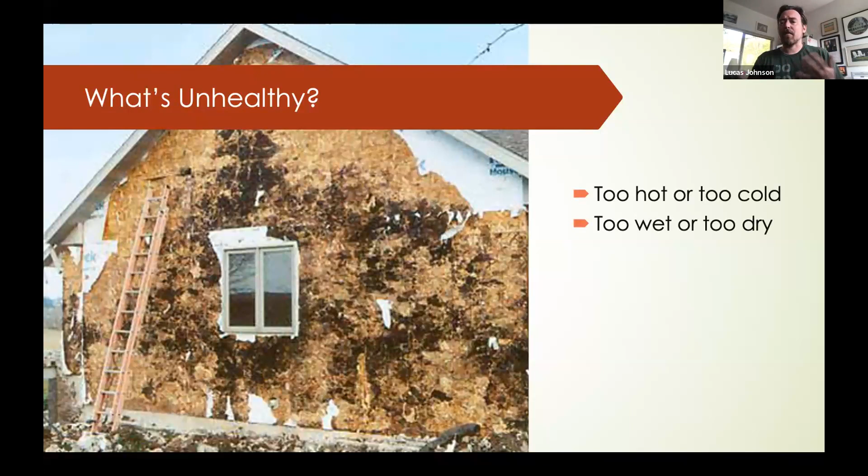To make it very basic, what is unhealthy, right? When things are too hot or too cold, we get a lot of issues. When they're too wet or too dry, we get a lot of issues. So think rot, think mold, that kind of stuff like you see in the image. What's often not really appreciated sufficiently is that toxic chemicals and particulate matter are major, major, major issues to our own health in buildings, right?

And what does that translate as far as materials that are used or things that are used in buildings? That would really come down to natural gas and synthetic materials. So these are two things that we really should be avoiding if we want to maximize our health, the health of the planet, and the health of our communities.

I don't know if you've heard of something called sick building syndrome, but it is a very important thing to understand. It's officially recognized by the medical community. And one thing that's been really neat to see recently is how much the building science community and medical community are actually starting to communicate for once. I don't know why it took so long, but it's definitely a good thing that we're starting to communicate more.

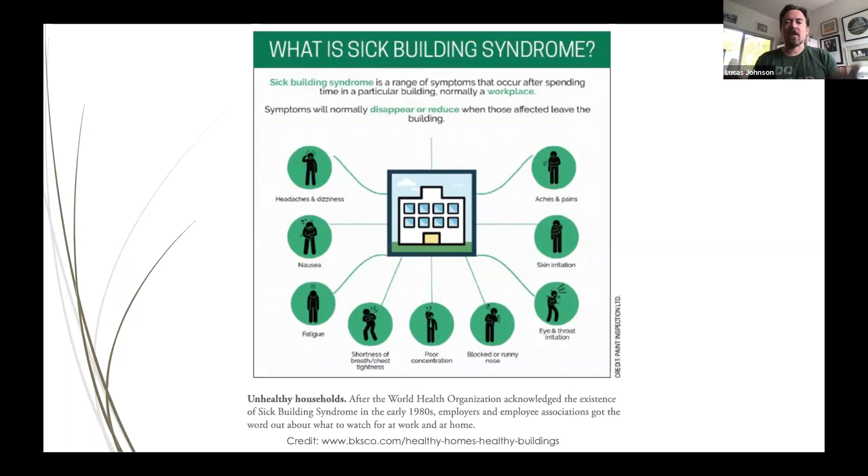So effectively, sick building syndrome can be experienced much the same as a flu or a cold, and that comes from being too wet, too dry, too hot, too cold. Synthetic materials and natural gas tend to be the leading causes of sick building syndrome. So on the flip side, what is healthy, right? This is a very interesting question that's actually more complex than it seems on the surface, because the easy answer is, well, you've removed unhealthy materials, so now it's healthy. But it's a lot more than the lack of unhealthy ingredients.

Two examples. One is, if we're going to optimize indoor air quality, IAQ, we need to not only avoid unhealthy ingredients, so using non-toxic finishes, furnishings, cleaning materials, but we also need to be adding something that provides continuous fresh air, and ideally does that through a heat recovery system, so that when we're providing the fresh air, we're not bringing too much heat into the building during summer or making the building too cold during winter, because again, too hot or too cold is also a health issue. So it goes a lot further than just avoiding unhealthy ingredients. There's also a lot of proactive actions you need to take.

So enclosure systems being foundations, walls, roof systems, that kind of stuff, what the building is actually made out of. It needs to avoid toxic ingredients, but a really critical thing that's very often missed is we need to be able to dry faster than buildings get wet to avoid water accumulation. Water accumulation tends to be the root of all evil in buildings.

So the way we see most buildings built, driving around Phoenix, right? You see OSB sheathing with an inch of EPS foam insulation taped, perforated a ton of times by staples to attach stucco mesh, and then a thin coat stucco goes on top of that. That is not a building system that is able to dry.

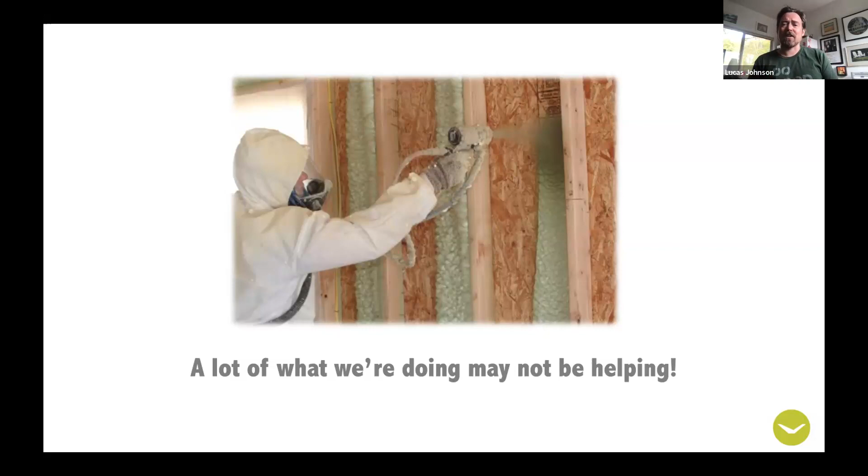It tends to not be installed perfectly, and then water can circumvent it, and then it can prevent drying, so it accelerates rot and mold failures. You can't remove it from wood, so you can no longer reclaim wood at the end of the building's life cycle. Wood that has foam applied to it is now trash. And just on the health side of things, little pro tip here, if you have to dress up like you work for the CDC during an outbreak to install insulation, it might not be super healthy.

So there are a lot of certified buildings out there, and I want to really emphasize that there are so many people who think they're really doing a good thing. This was me as well. At the beginning of my career, I installed a lot of spray foam, and then I started collecting data on it and understanding better the full life cycle carbon impact, the health impacts, going back and doing a blower door test, which tests air leakage in buildings, a year after it was installed, and finding out that the air tightness we delivered a year ago was nearly gone, because buildings move a lot and foam shears off the things it's supposed to seal.

So I really want to emphasize that people are out there trying to do a good thing, genuinely believe that they're doing a good thing, and genuinely want to. But unfortunately, the data does not support that they actually are doing a good thing. So we hope to provide that information and inspire people to keep learning, right?

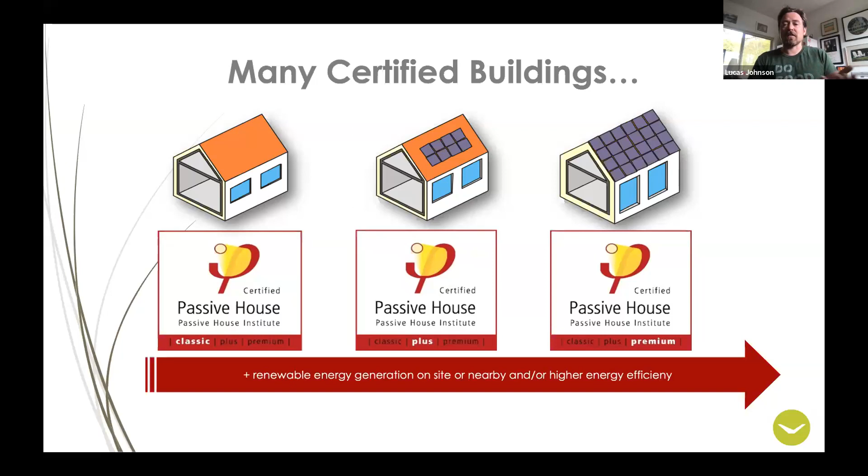A great analogy that can be used is if you're going to go on a diet, right? We need a carbon diet for our buildings. You wouldn't go pack on 100 pounds right before you go on a diet. That would make no sense. But that's what we do time and time again in the built environment. We add a crazy amount of carbon up front to build an efficient building. And then the payback period is often decades, if not over a century. And the well-intentioned building then does not actually achieve its goal of reducing our carbon impact.

So one great way to summarize this is sustainability is no longer about doing less harm. It's about doing more good, right? The less bad approach is no longer sufficient. We need to encourage more good, not less bad.

So digging into that, this is an introduction to our 5 factors. This is how we make design decisions as a company and how we specify the key ingredients to make it actually happen, to actually achieve the goals. So the 5 factors of good building, simply put, are comfort and health, efficiency and renewables, durability and resiliency, social equity and embodied injustice, and life cycle carbon impact, right?

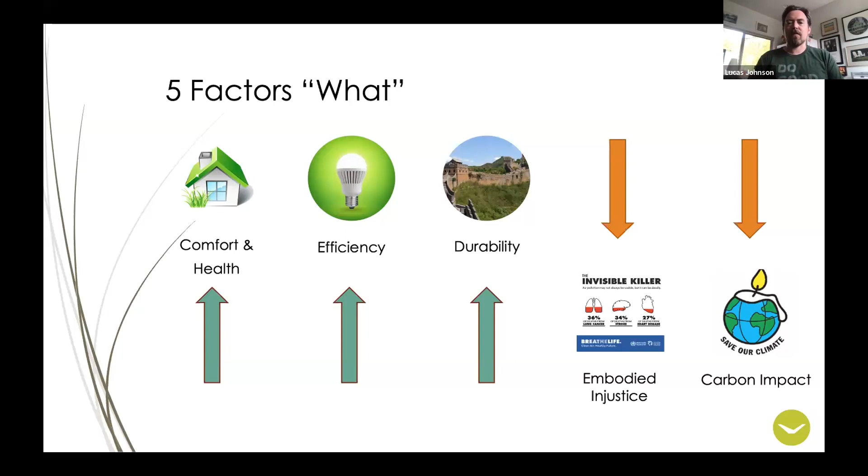So that was a quick intro, and we're going to slow down and focus a little bit on each of these factors. Since this is normally at least a half-day presentation that I've condensed into about 30 minutes, we're only going to go into one example of each of the 5 factors, whereas there's actually at least 10 to 20 elements of every one to get into. If you're interested, we're always happy to talk about this in more detail, so please follow up with us afterwards.

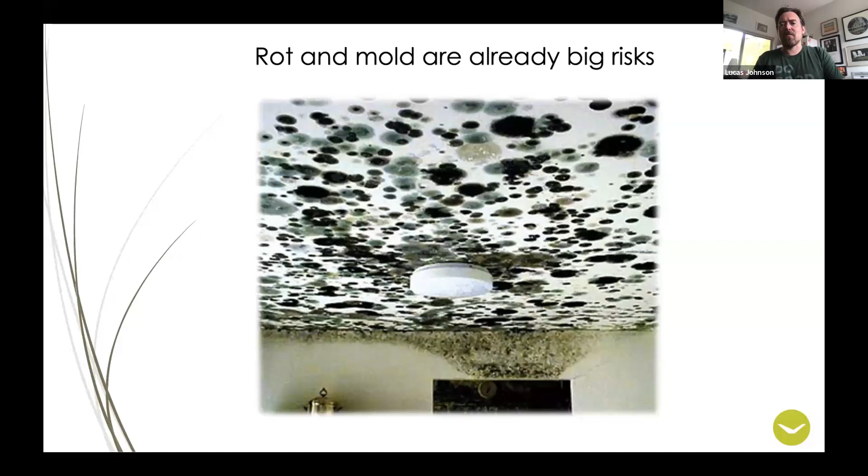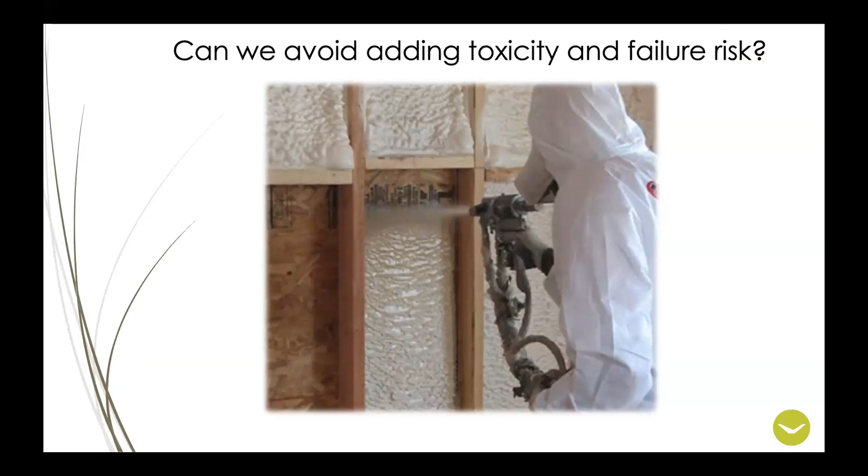Oftentimes it's a little worse, right? It's just fiberglass batts or something instead of the spray foam. The spray foam's often looked at as an upgrade. So I'd estimate maybe 10–20% of buildings. You'll see spray foam even more often in unvented roof systems, right? Because of the way that code was written. In Phoenix it's more like 50% probably, at least. Phoenix is probably the largest market of spray foam in the country. And that's just a terrifying result.

I mean, if you think about this product life cycle thing, is it really even fair that we ask this person in the photo to risk exposing themselves to all these chemicals to install this? Is it fair that we ask occupants to then expose themselves to all the chemicals that are off-gassing off of this? And maybe if foam worked as an air barrier in a durable way and actually provided good insulation value, maybe, just maybe, it'd be okay then.

But it doesn't work very well as insulation in our climate because there's a lot of temperature change and very high temperatures and all that stuff. And it doesn't work well as an air barrier, and it doesn't work well as a water control layer, because you may not know this, but buildings move a lot due to heating and cooling cycles, wetting and drying cycles, and also in the Northwest, especially seismic motion, right?

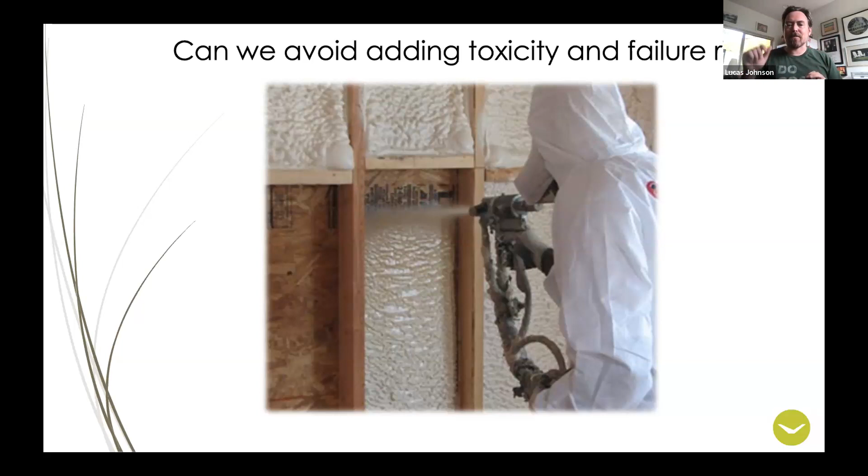And a big windy day, when you hear your building creaking, right? That's the building materials moving. And as the wood moves, it moves very differently than the foam. And then the foam will tend to shear off of that structural framing and cause little gaps to occur that then cause all kinds of problems with performance.

So from a health standpoint, if you're not aware of something called the Red List, this is definitely the thing to write down and understand that exists. It gets added to, I believe, every 2 years. Maybe it's updated every year at this point. And it provides a list of chemicals that we know have negative health impacts for humans, right? So it becomes this list of things that we need to avoid in our building materials.

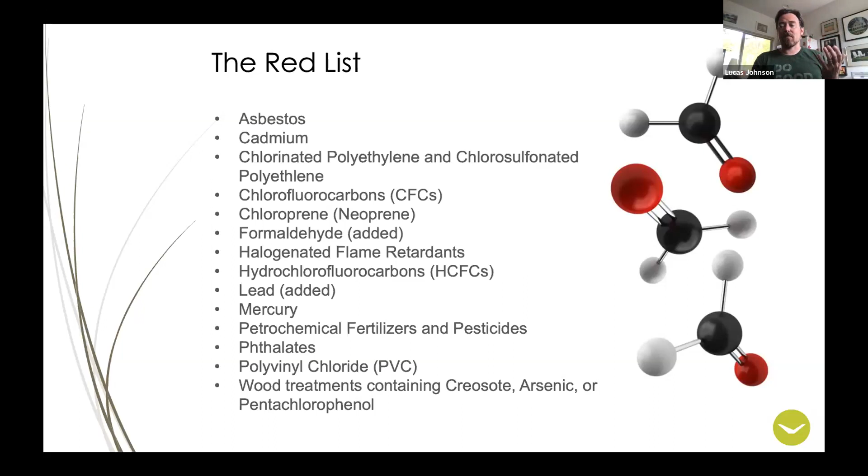The question then becomes, how do we actually know what's in our building materials? And there's a lot of motion towards addressing this in various different ways. I think the best thing out there right now is the Declare label. It's a project of the International Living Future Institute. And it's effectively similar to a nutrition label that you'd find on food. It's third-party data that's collected, verified, and then they give you a label that will tell you, is it Red List free? Is it compliant, or has it been declared?

So sometimes if it's declared, you need to read the ingredient list very carefully to understand what bad ingredients are actually in there. But at least it's a step forward to put it out there and say, with full transparency, these are the ingredients that exist in this product. That's a really big deal. And stuff like this is starting to be much, much more available. Great question to ask a manufacturer if you're going to buy a product is, do you have a Declare label? And if they say, what is that? Then that's not a great start to that conversation.

So efficiency and renewables is something I want to focus on. Obviously, they're both very good things. The problem is that we've had far too much focus on efficiency as a proxy for everything else, being comfort and health, low carbon impact, social justice, et cetera. And the reality of it is that if we focus on efficiency first and foremost, we often have a lot of negative side effects and negative outcomes in the work that we do.

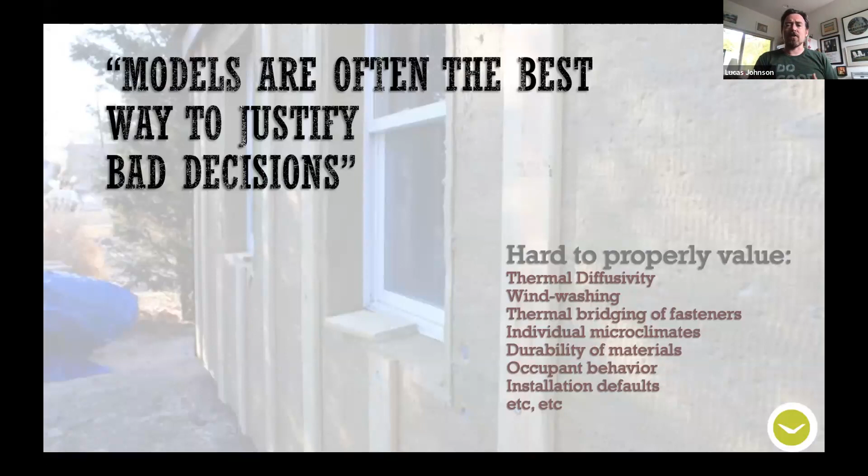What we need to do is collect real world data on real products applied in the climate that we're building them in. That's a lot of the work that we do as Vali Homes, is applied research in the desert climate. And one of the sayings I like to use is all leaks are not created equal. If you're wondering why old, very poorly insulated buildings are still standing, it's because they had really, really big energy, AKA air leaks through them, right? And those air leaks took water through the building really quickly. And when the building did get wet, there was enough air leakage to dry out the building.

During winter, your heating system is blasting warm air through your enclosure systems, through your walls, through your roof, drying out the building. And also, when the leak went through the building in the first place, it didn't have much time to leave moisture behind. Now we're entering a world where energy codes and goals of building better buildings have led to much higher degrees of airtightness and insulation, which leads to longer, smaller pathways for air to get out of a building. And when air is leaving a building, moisture takes a ride on that air, right? And the longer, slower the pathway, the more moisture is left behind and the less drying potential we have.

So we're really accelerating the water accumulation in our buildings, and frankly, just not acknowledging that fact. If we understand that, then we can build buildings that properly work with the laws of nature to encourage drying. But we assume buildings aren't going to get wet, especially in our climate, and that leads to a lot of failures.

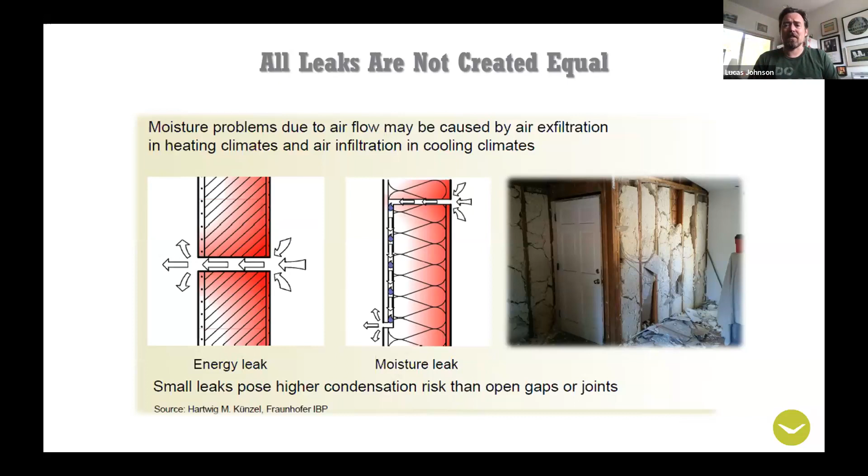And these failures can occur at the scale of a 32nd of an inch crack, and the cracks there are a lot bigger than a 32nd of an inch. So effectively, that insulation is doing almost nothing, right? It was just a high carbon impact, unhealthy thing that was put in the wall and caused more moisture failures to occur. It didn't really even work as insulation. So no bueno.

Embodied injustice, right? This is a really, really important thing that we focus on. It was the factor that we added most recently, frankly, because it's not really our area of expertise, but the story is obvious enough that it became critical to talk about, right? So I would argue it's long past time to tell this story.

I'm repeating that image that we talked about earlier with the product life cycle coming from happy farms in New Zealand versus problematic factories, and drawing that analogy between the manufacturing production side and the installation side, right? Like, this is a photo of Austin and I installing red list free, so completely non-toxic, healthy, durable materials. This is the degree of protection that we needed to install these materials, right? I was wearing like partial gloves. Austin's not even wearing gloves. That's the level of protection you need from these materials, versus installing spray foam, where again, you dress up like the CDC during an outbreak.

That just is insane. And Austin, you have pictures of your little boy installing insulation in a project, don't you? The lamb's wool. Exactly. Yeah. We just installed some in a little shed we're building in our backyard. It's a great image. I mean, he's completely buried in the insulation. It's so cute. Yeah, it's the Havelock wool insulation.

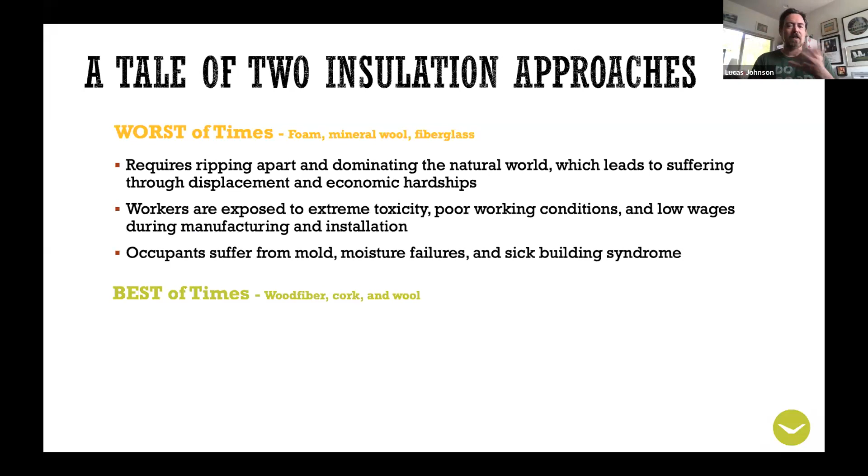Then there's the best of times. That would be wood fiber, cork, wool. I should give a shout out to the hemp wool people now. There's a US made product using reclaimed hemp fibers to create insulation. So there's some really cool naturally based insulations out there now that are produced in harmony with nature. They sustain environments, they improve lives. Workers have healthy working environments and better paying jobs. And occupants enjoy healthy, durable, and comfortable spaces.

It's fundamentally different. So if you're going to switch anything in the way that you build, the way that you approach things, the way that you talk about things, it's the insulation we should be talking about. It's the easiest thing to change, and it really is the most meaningful thing we can easily change.

And a way to summarize this is one of the biggest problems that happens in our industry, and this is almost invisible to anyone who's not on construction sites on a daily basis, is this saying of that work sucks, let the less privileged of some type do it. And it's really unfair that we do that. It's really messed up. And the people who are doing it, it's not like they're being paid good wages to do it either. They're being paid almost nothing to risk their lives. It's really an unfair thing that we need to change.

And that's one of the things we really focused on at our Valley Muse project, is making sure we brought the craftsmanship back to construction, making sure we honor the people that do the work, and make sure we don't ask them to do anything that's risky to their livelihoods.

So the last thing I'll focus on in the 5 factors, because it's the 5th of 5 factors, is life cycle carbon impact. This one gets a little complicated, but I'm going to try to keep it as simple as I can here. Going back to remembering that you wouldn't pack on 100 pounds before you go on a diet analogy, I think is a good way to think about this.

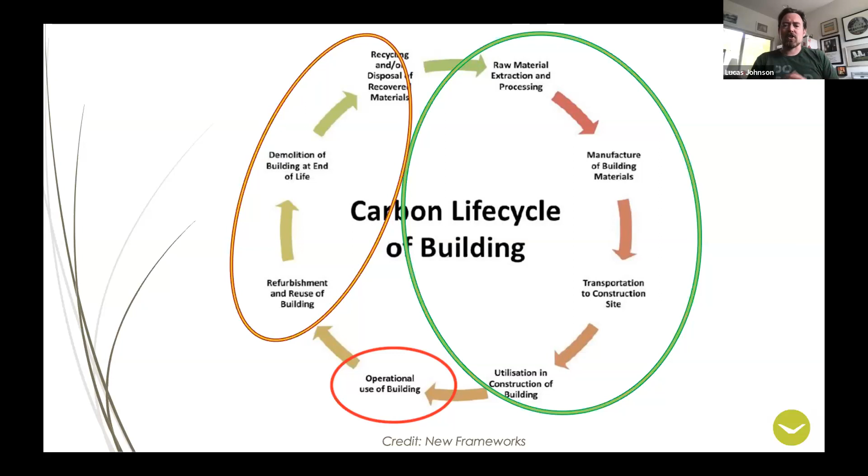I'm going to focus on the upfront embodied carbon, often called material carbon emissions as well, for this next slide, and show you kind of how this translates into reality at the current moment. So this was a study done in Toronto, but it was looking at carbon use intensity over the next 20 years of a building. And obviously, using high carbon impact materials in a low efficiency building is going to have the highest carbon impact. I think that's pretty obvious, right?

But what blew a lot of people's minds is that high carbon materials in a high efficiency building, and we're talking about Passive House here, the most energy efficient buildings on the planet, still results in a crazy high carbon impact over the next 20 years, because we haven't paid back that upfront carbon that occurs through the building materials that we use to construct an efficient building.

Now, if we use mid-carbon impact materials in a low efficiency building, so basically a code compliant, code minimum building, but with lower carbon materials, that's actually lower carbon impact than a passive house built with bad materials. That's pretty mind-boggling. Then if we do a mid-carbon high efficiency building, it still makes some difference, but it's really not getting to where we need to go, which is actually reducing our carbon impact.

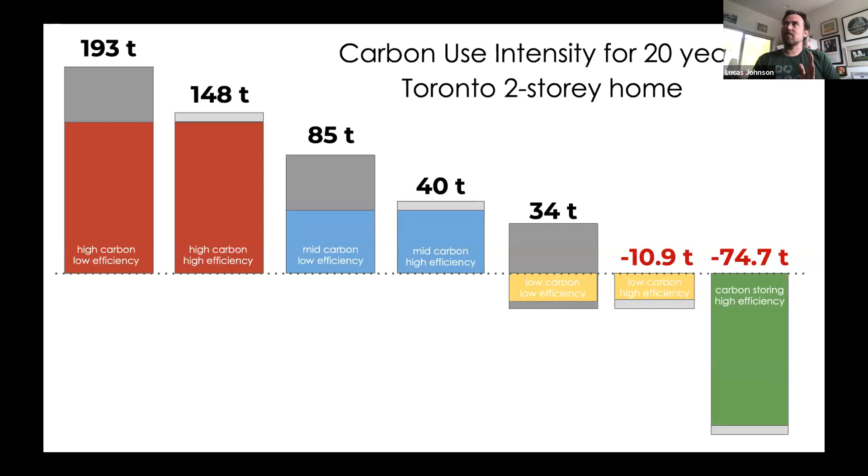Then we get into a low carbon material with low efficiency. We're getting close now. Then we get to low carbon materials with a high efficiency building. That's passive house with low carbon materials, which unfortunately isn't affordable for most people, but that's going to create actual net carbon storage over the next 20 years. And then we get to carbon storing materials with high efficiency. And even a more or less code compliant building built with these kind of materials is also going to be net carbon storing. So this is where we need to go towards.

And if you notice, what makes the real difference is what materials you use to make your building, not so much the standard that you meet in terms of efficiency. Again, it's still ideal to do energy efficiency and make a building very high performance if you can afford it. But the fundamental shift we need to start making is we need to use low carbon materials to achieve whatever performance standard we're going for. And those low carbon materials are the ones I was talking about in terms of best of times.

So the really good news is, again, insulation's the thing that's easy to change. And if you use the low carbon insulation, that also tends to be the healthiest one and the one with the least social justice issues, and it actually works for performance. So making the shift in insulation is really a key message to take away from today.

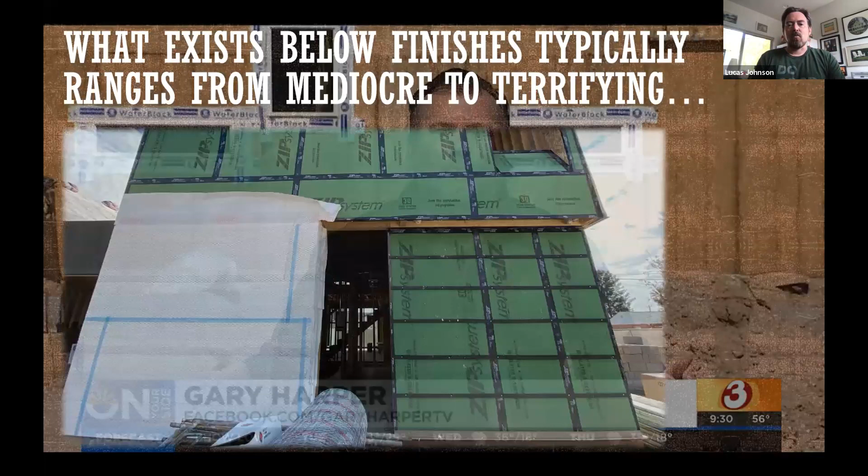And I'll wrap this up by saying, as we shift into talking about the Valley Muse project here, what exists below finishes typically ranges from mediocre to terrifying. There's a good reason that most people don't invite you to a building until the finishes are installed, because the finishes are there to make things look nice over all the conventional, synthetic, poorly made, high impact materials that are typically used in buildings. One example is that we see projects where performance is the goal, but there's still the wrong materials being used. It's still the same conventional synthetic materials.

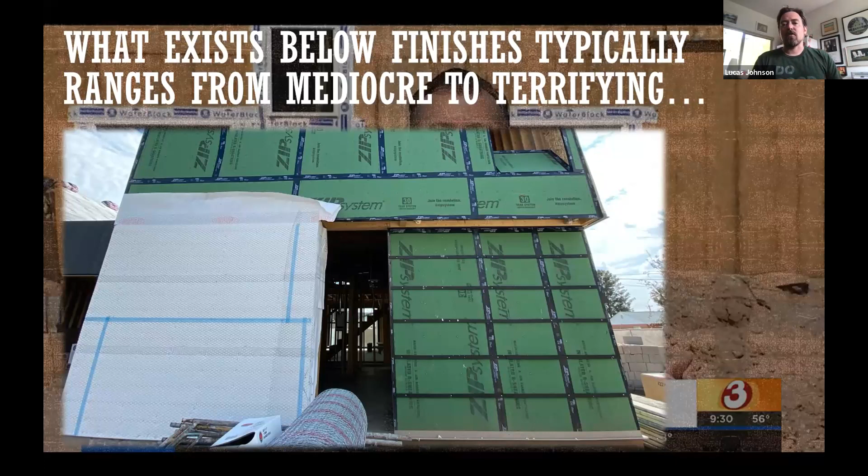If you want an example of what I mean by spray foam not working to achieve its primary purpose, this is a little overhang detail. This foam was supposed to be put in there to be an air and water control layer. You can see that the foam didn't even fill it in properly, so there's still a lot of air leakage. You're still going to get moisture intrusion into there, but the foam will minimize drying. And it's made it so that this tiny little detail is extremely high carbon impact, right? So these synthetic materials don't even achieve the fundamental purpose they're supposed to achieve that well.

So again, our shifts that we can make simply come down to the performance measures. Insulation's the one I keep mentioning, but it's also what we use for our air and our water control. Those things really don't make an overall difference on most budgets, and it can make a fundamental difference on how well a building actually achieves comfort, health, durability, efficiency, life cycle, carbon impact, and social justice issues.

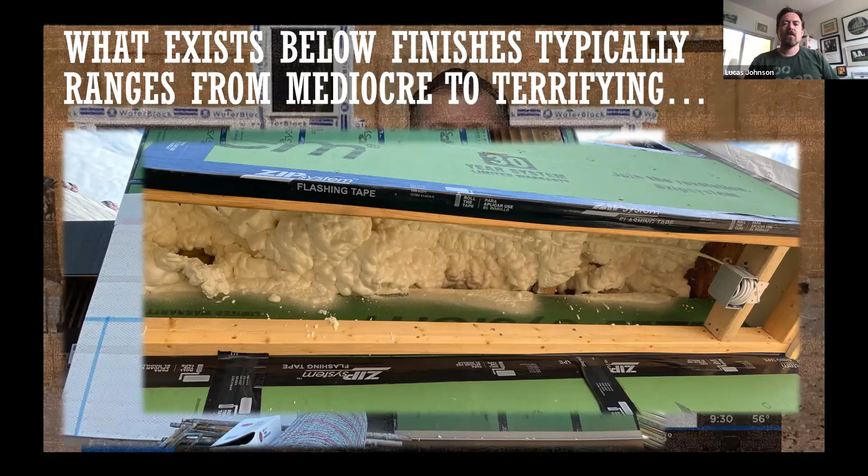So Valley Muse, coming back to this project. This is a photo of it actually built now on the right. And we're going to start by going up to this upper story deck that we have.

This is what it looks like up there now. Beautifully staged. Thank you for the people who staged it. And made out of extremely healthy materials, right? This is a Kebony wood. It's not your synthetic decking materials. This is actual wood that's treated to last for, you know, decades without any maintenance.

It feels like butter on your feet. You're not going to get the little nasty plastic splinters from that. It looks gorgeous and it lasts, right? And we've tested that in this climate. There's an actual 3-coat stucco that was installed as a labor of love. It definitely takes a lot longer to do that, but it creates a much better result.

And underneath, we're very proud to show you what exists beneath the finishes, right? We started doing our open houses when we were in the framing stage because we're so excited about what we've installed below the finishes. And luckily, we documented this pretty well. So the first thing we did is make the buildings look like giant Smurfs. They're fully wrapped in this blue membrane.

That's a non-toxic, red list free, air tightness and water control membrane that also can breathe. In other words, it can allow moisture to move out through it. So when the building inevitably gets wet at some point somehow, the building is actually able to dry.

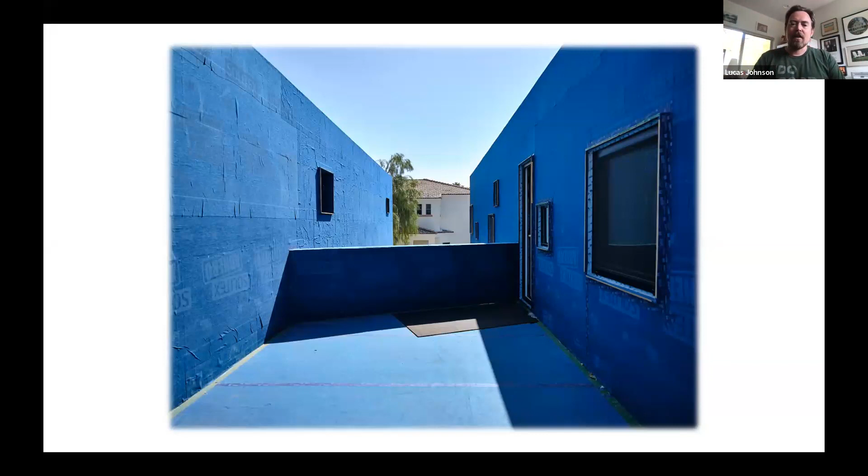The next step was to put on a carbon storing wood fiber insulation from Germany. And two things to mention. One is this is still a vapor permeable insulation. It's actually rated as a water barrier on its own because it has a tongue and groove integration. So when it does get wet, it can also dry. So there's nothing yet in the wall system that's going to inhibit drying. If and when it does get wet, it can dry readily.

You can see that we put a lot of extra effort into doing waterproofing details around doors and windows, because that's a critical little step to do. This insulation is also carbon storing up front. So it actually stores thousands and thousands of pounds of carbon on the building up front. We're very proud to have recently been featured in a white paper on low carbon buildings because of this type of approach.

And then you can see that over the wood fiber insulation, we started putting on a ventilation channel so that we have what's called a back vented stucco system. Stucco holds a lot of water, so you don't want to put stucco directly against your building materials. You want to separate your cladding, stucco or whatever it may be, from your performance layers below.

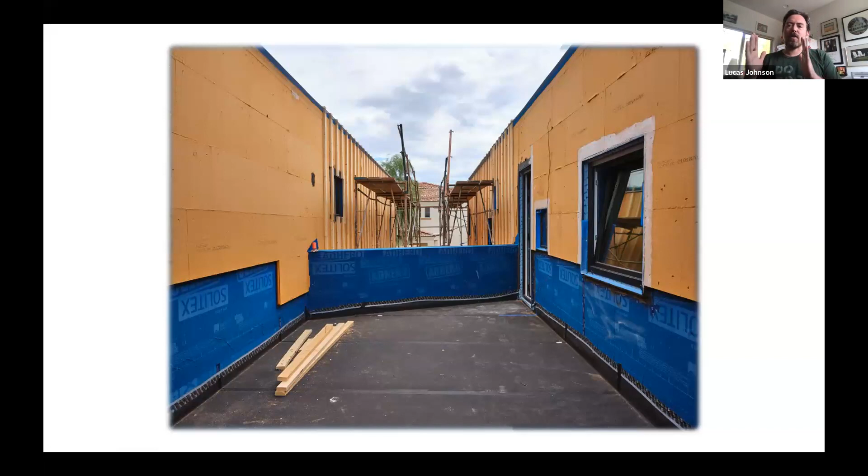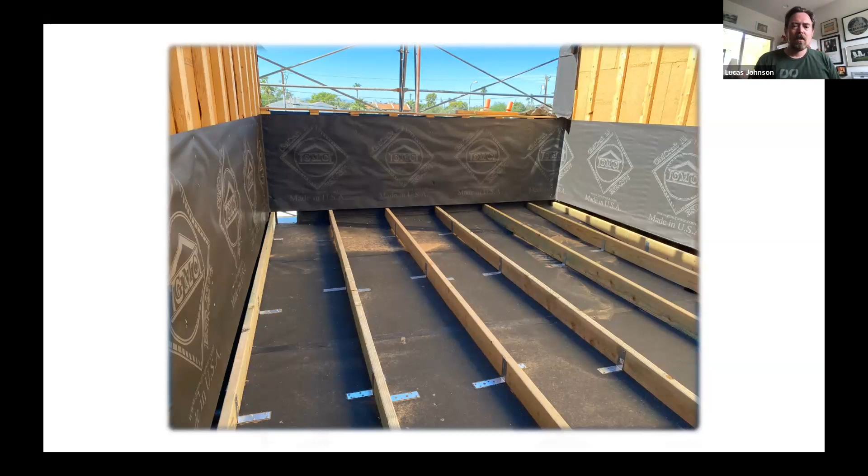So the 2x4 battens were put on, and then the stucco system was installed on top of these ventilation battens. And that air gap actually also really helps with insulation performance and comfort during summer and winter conditions. So this is, again, the final product, but there's a lot of magic behind the scenes.

And one of the things that I was actually blown away by, going into our own project, was the acoustical quality in there. You can't hear anything through the walls and windows. There can be construction literally occurring just outside the window and you don't hear it. And that was to be expected with achieving very high levels of efficiency. Our buildings meet Passive House standards, and actually exceed them significantly.

So I expected not to be able to hear outside, but what I didn't expect is to have such an incredible level of sound management within the building. You can hear conversations at different volumes. Nothing is bouncing around and annoying and giving you a headache. It just feels like such a relaxed, lovely space because of the acoustical elements of what was achieved. We can thank Austin and his love for music and being an audiophile for those elements.

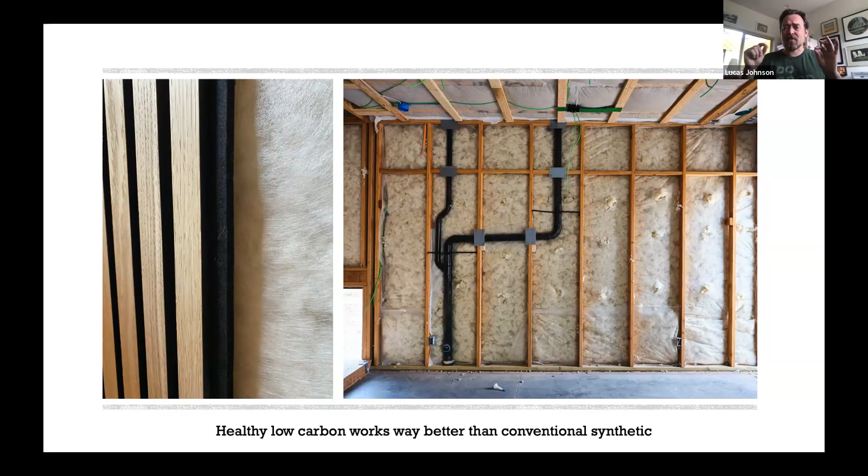Biophilia, our natural love for nature, is one of the core elements that we focus on in our work. And really, it's a complex, deep subject that's based on a ton of scientific research, et cetera. But the quick summary is that nature makes us happy, right? Being connected to nature makes us happy.

One of the things that's come out through biophilia research is that interacting with wood will help make us happy as well. So we did custom wood handles and wood railings everywhere through the building so that you would have a physical moment to touch wood often, which frankly, from watching people tour through the building, really does create a tremendous level of stoke, if you will.